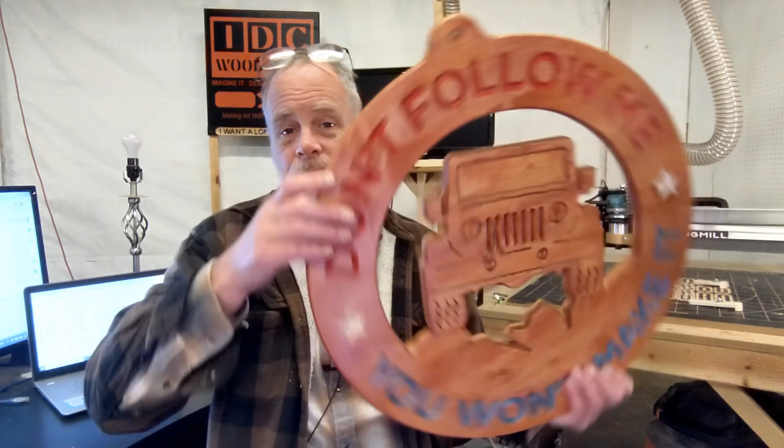How are you supposed to know when that bit change needs to take place? Does your software tell you? Does the CNC router tell you? Well, this is exactly what we're going to dive into in this video.

There are three ways that this actually can work, and that depends on your CNC router and the control software that's running your CNC router and something called a post processor. But I'm going to cover the most common way that most CNCers have to deal with this. It really goes along with the benchtop CNC routers.

And so we're going to dive into this by going through a project I just designed for my daughter, this LED acrylic project that has a lot of meaning. I'm going to just kind of run through it real quick. I won't actually do the design work, but I'll show you about the setup for the tool change and why this tool change takes place in the way that it does and the way it's going to work for you.

So on this project we will have one bit change. We're going to start off with a bit called an O-flute bit. Now this is designed to carve the acrylic material, and then we're going to switch over to the Widget Works diamond engraving bit to get a lot of fine detail into this project.

You're actually going to love this bit, and by the time you're done, you're going to know a whole lot more about this than most CNCers know, because I'm going to give you it at the technical level so you understand the back end of it, why it works this way.

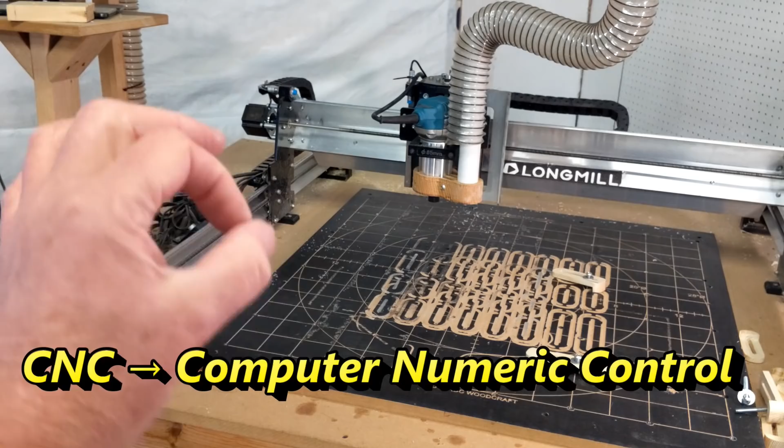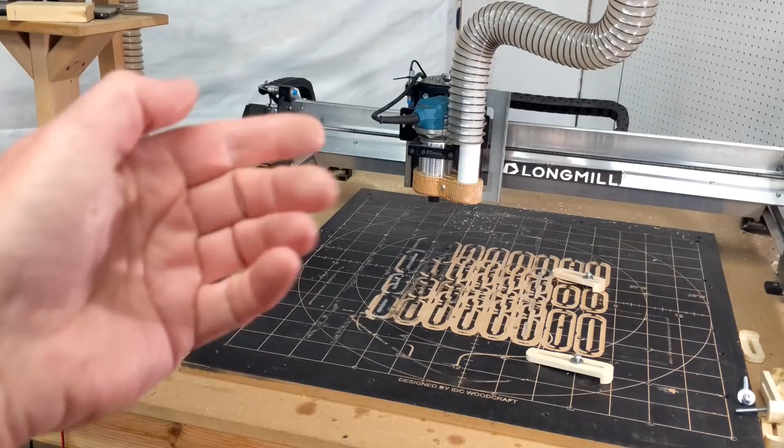It's a completely independent machine to your CNC machine. CNC stands for computer numeric control, and it is basically a machine that just moves around in space in an X, Y, and Z fashion. And then when you attach the router to it, that's what makes it a CNC router. If you have one that has this type of setup, this video is for you.

If you have one that has a tool changing probe set up on the side and it has that feature within it, within your router, where it can use that probe to set itself, then that's kind of the next level, but it still applies here to you.

The third one is when you have something called an automatic tool changer. Now, automatic tool changer is when all your router bits are already set up in holders and they're stationed along here or back there or in something called a magazine where they're all mounted in magazine indexes, and the router itself goes back and gets the next tool and goes right into its carving. That's an advanced machine that's got a lot more to the brains of it, very expensive.

Most people get these benchtop machines like the Longmill, so that's what we're going to cover in this video. So let's get into the software.

I'm going to talk briefly about this acrylic project and then how it's set up with a bit change, and then we're going to get into the bit change itself, and then we'll actually carve it out, and you're going to learn a bunch of details along the way, lots of tips and tricks as we go along as it relates to CNC routing.

Okay, we are in the design software where we're creating toolpaths, and we are going to define the points at which we are going to change our router bits.

So first two things I want to tell you. It doesn't matter what software you have for your CNC router, if it has this area where you can do your toolpaths, where you're telling it what bits to do what, you have the ability to write the code, and this is where the tool changing aspect comes into play.

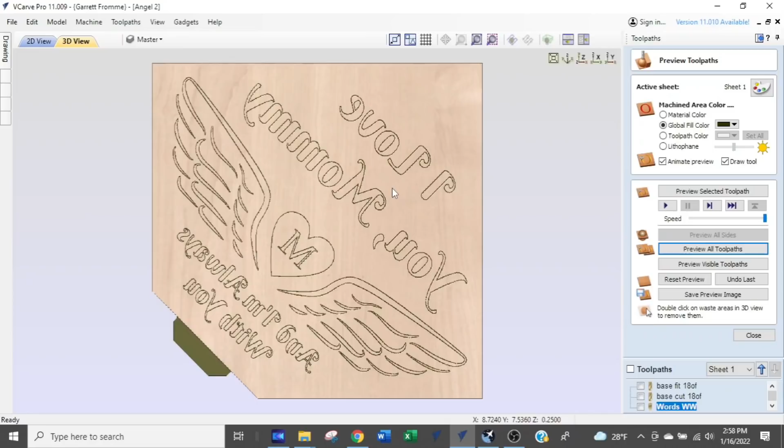Now you can do it with what they call O-flute bits, which I'll be demonstrating in a minute, or you can do it with an engraving bit. And I love the engraving bit because you can get really super fine detail if you want a really ultra detailed project. And then I have the lower corner here, and you see that's cut away.

And I've cut that away so it'll sit in the LED base like this.

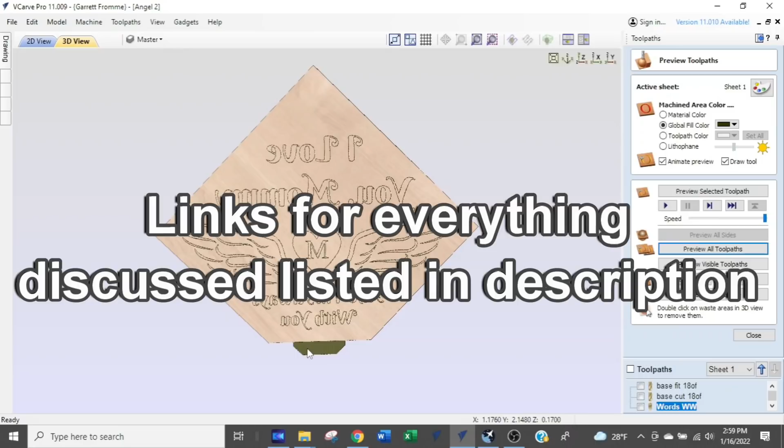So the first thing I'm doing is doing the work with the 1/8 O-flute bit, where I'm going to cut this green area, and then I'm going to cut out the corner, or cut it away. And then the second thing we'll do is do the engraving.

Why am I doing the cutting first and the engraving second? It's because I will leave the protective plastic on the acrylic while it's doing the cutting, because as little pieces of acrylic go flying around, it could potentially scratch a little bit on the acrylic, and I don't want to do that.

So the engraving tool does not spin. It's called a drag bit, so you don't even turn the router on, and so therefore it's not throwing a lot of debris. So here's what it's doing.

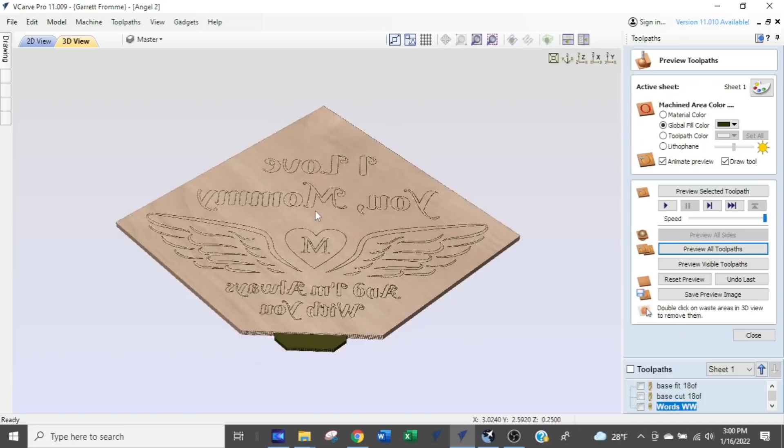I'm going to reset this preview, and I'm going to reorient the project, and I'm going to show you the first tool. I have 3 toolpaths, and the first 2 are with the 1/8 O-flute bit that's actually going to be cutting the project, and the last one is the engraving bit doing the design work.

So I'm going to click the little white box next to the first toolpath where it says base fit. What that's doing is actually cutting a pocket in the project.

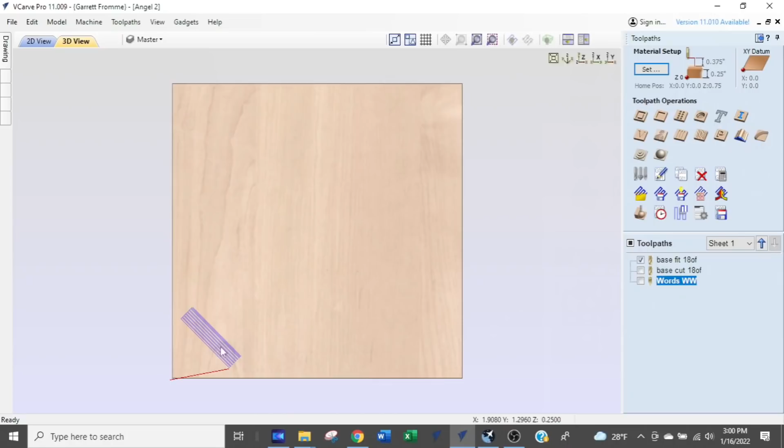And that pocket is actually thinning out the project material because the LED base has a slot in it that's 3/16 wide. The acrylic sheet that I have is 1/4 inch wide, so I have to make it a little bit thinner so it'll actually slip into the base.

If you decide to get acrylic to do this, I suggest that if you're going to get that base, you also get 3/16 acrylic. It needs to be cast acrylic. Plexiglass does not work, or general acrylic doesn't work. Cast acrylic is interesting because it's very stiff, rigid, and if you drop it, it'll break like glass. But it's much easier to carve.

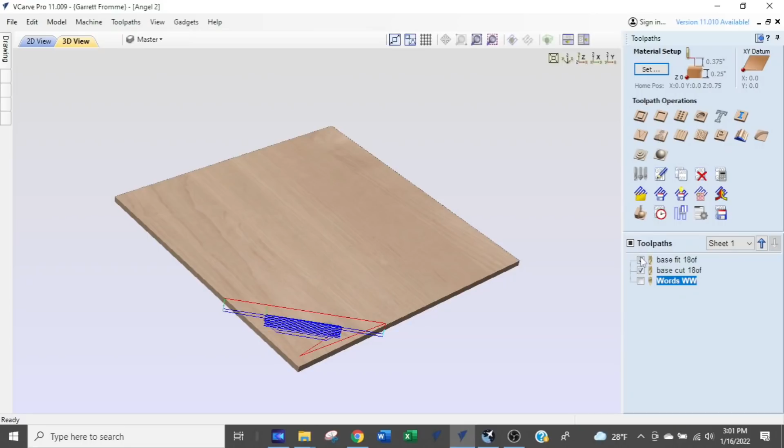So that's the first cut, is to make it thinner so it'll slip into the base. The second one cuts the corner off, and you notice I got kind of an interesting shape on that corner. I'll explain that to you in just a minute because it was a brilliant little test that worked great. And then third, with the engraving bit, it actually carves everything out.

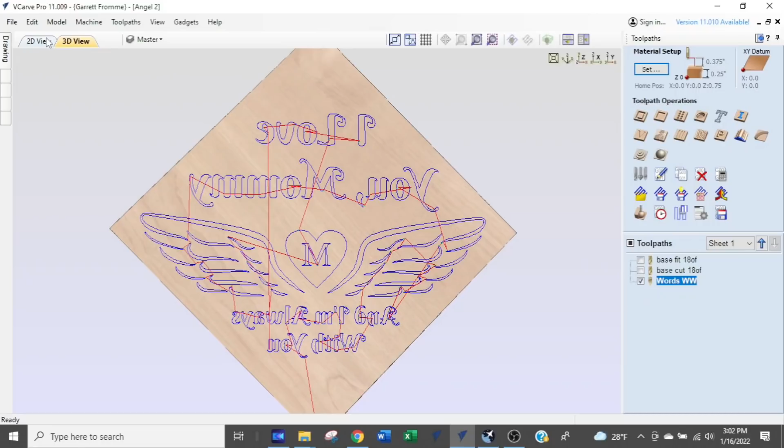Before I go on, I want to show you the project itself and what it really is and what it means. So I'm going to just change a couple of my settings here, and we're going to flip over to 2D. And so this is the way I've designed it on the project.

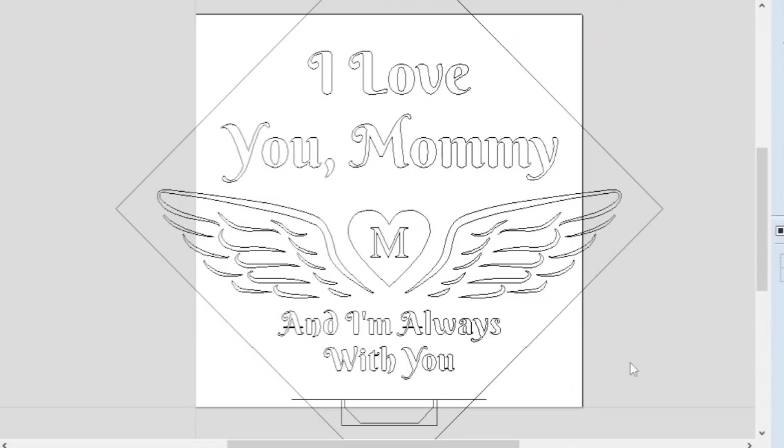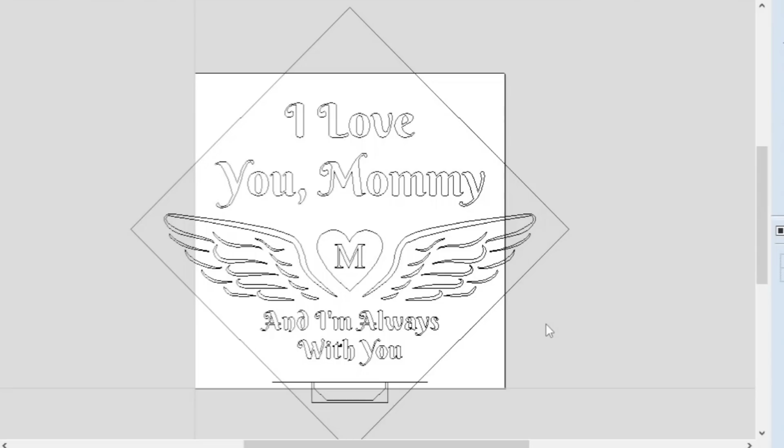I've rearranged it so you can see what it actually says. It says, "I love you, Mommy, and I'm always with you," and it has angel's wings and a heart and an M in the middle. This is for my daughter, who 4 years ago this month, January 2022, gave birth to Maddox, my third grandson. A little while later, Maddox died in her arms, so this time of year is pretty tough for her. She likes things like this to make her feel a little closer. In a way it's sad for her, but in a way she likes it. So that's why I'm making this.

Let's get back to the other aspect of this project. We are going to have this project looking like that when it's done, except it's going to be really cool with the LED. So this is where it becomes really important for you to know and understand this bit-changing process. I've given you a lot of precursor as to what we're going to be doing here for this bit-changing thing. It's important to understand all the upfront stuff in order to understand why we do the bit changes the way we do it and how it's going to be processed through the entire system when you get to the bit change. So we're going to get back into the design software and start talking about saving toolpaths and into the bit change aspect of this. So you're getting a lot of information. Give me a thumbs up if you feel like I'm giving you some extra tips in this video. All right, let's get back into this.

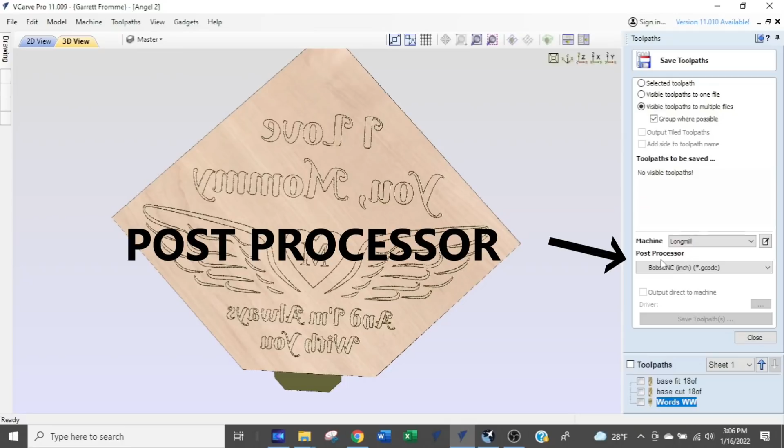In the Vectric software, we are going to go into saving our toolpath. Now in your software, whatever you have, if it's not Vectric, you save your toolpath in one way, shape, or form. When you go into Save Toolpath, you may have a selection in there of the machine that you have. All routers have certain codes that they have to know what to do, and it really depends on the sophistication of the machine that you have. But that code that is being put into the router is dictated by something called the post processor. The post processor is basically a rule book that tells Vectric, or your software, how it can write the G-code and how it can't write the G-code.

Now I want to explain to you what G-code is so you understand this. G-code is the language that our Longmill here, or your CNC router, uses to know where to move to and how to move to that position, and all the different moves that it makes. So G-code is the language that your CNC router speaks. It's not something you have to know, but you just need to know that it's something that's in a file that's going to be dictating how you're going to be handling your router bits when you're doing your router bit changes. So that's what G-code is all about.

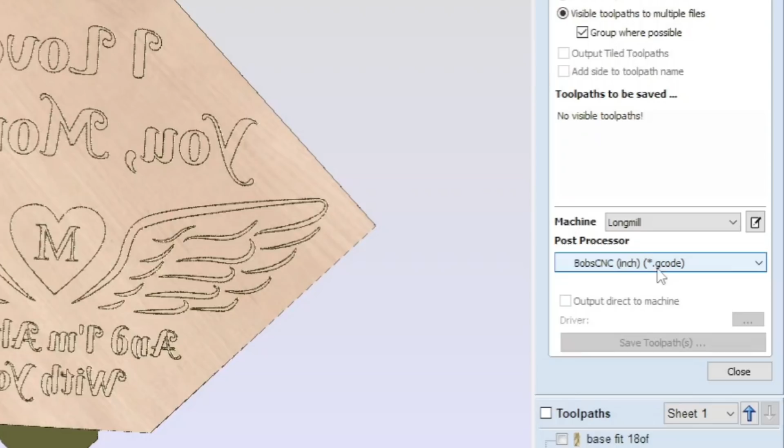Let's get back into this. So when we're talking about the benchtop CNC routers where you have a trim router mounted to it, there are certain conditions that have to take place to enable you to stop the router and be able to change that bit. And that's what the post processor is set up to do. Now if you look here, I have a Longmill CNC router, and currently I'm set up with a BobsCNC inch post processor. Sometimes I use the Grbl. I have a Longmill, and Longmill actually has finally written one for their machine, so I'll be importing that. The Vectric software, in the next version or upgrade, will probably have the Longmill post processor in it. So anyway, this is the dictator of how that code is written and how you change your bit.

So let's explain this a little bit so that you understand what happens here. Your CNC router has a brain—it's got a control box that's attached to the machine itself. That's the electronics that's integrating with the machine. It's built for your CNC router.

And it can interpret some of those codes, and other codes it can't, or is not designed into the firmware on the board that tells it these are codes we will use or not use. So with our machines, there are two scenarios that will happen. The software, by virtue of the post processor, will write separate G-code programs for each router bit, or it will write a code and interrupt it with a stop command.

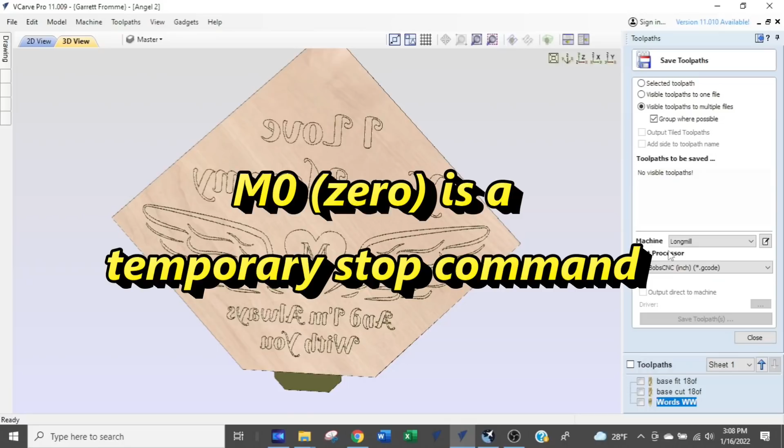That would be a code that says M0, and that is what they call a temporary stop. It'll pause the program, and that's where you can change your router bit. Usually when you have a post processor that inserts that code, there will be text underneath on your display screen that says, okay, we're using this router bit now, insert that bit. That's one way. The other way is it has separate G-code files.

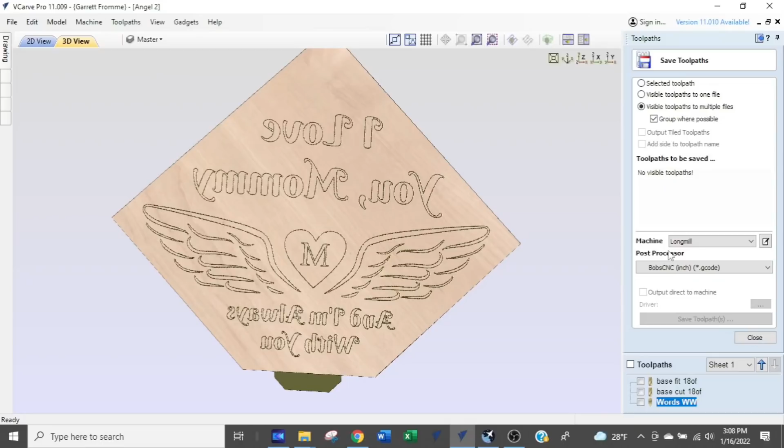Your CNC router will probably take the separate G-code files, especially if it has a trim router attached to it. So let's rehash this a little bit. There's one of two ways your CNC router is going to tell you that you have to change your bit. Number one is the most common, and the one you're probably going to deal with, especially if you have a Longmill CNC router, Shapeoko, Bob CNC, or Millwright. All of these will write separate G-code programs. You have to run the program out all the way and literally load a separate program.

Some other machines have a little touch plate next to it with an automatic cycle inside that requires another G-code, and that's where you'll have the M0 command. It also depends on the control software you're using, the software that is actually driving your CNC router. I use Gsender, and I'll be showing you that in a minute, and that's the one I totally recommend if you have any one of those machines I'm talking about.

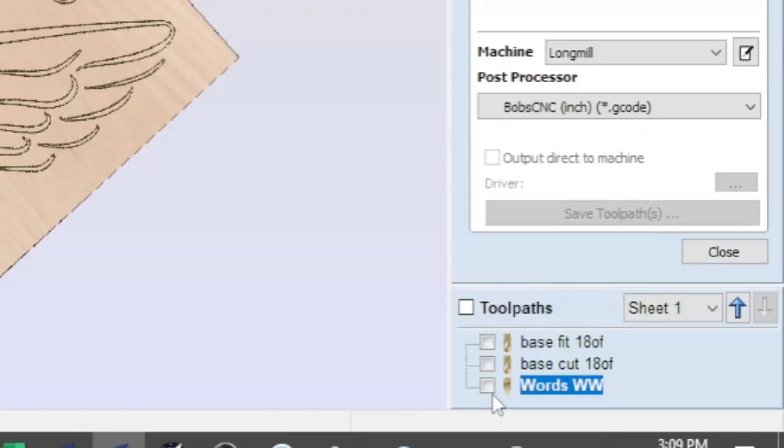So what we're going to do is select all the toolpaths together. That means I'm selecting 2 router bits, the 1/8 inch O flute and the Widget Works engraving bit. I select them all by clicking this little checkbox next to Toolpath. And when I do that, we are ready to go.

Now, up here is where we're going to tell Vectric how we want that G-code written. Vectric is going to use that determination to decide whether it can or cannot write that G-code based on the post processor we are using. Kind of hard to explain, but think of the post processor as a gate with a set of rules - if you pass through the gate, you have to take those rules with you.

So I'm going to show you what I mean. In Vectric, we're going to ignore this top button, and what we're going to do is select the second one where it says visible toolpaths to one file.

What that's saying is it's going to write a G-code file with all the toolpaths that are visible. Now, visible is whatever is checked down here, and you can see the blue lines over here, that's considered visible. So we've got all of them checked. I'm going to click this radio button right here.

And you're going to notice right away I get an error. What that error says is the visible toolpath used different tools, and the selected post processor does not support tool changing. What that is saying is the post processor is saying you cannot change your bit in one G-code file, or in other words, we cannot run one bit, have a change, and run the other bit in one file. We have to have separate files.

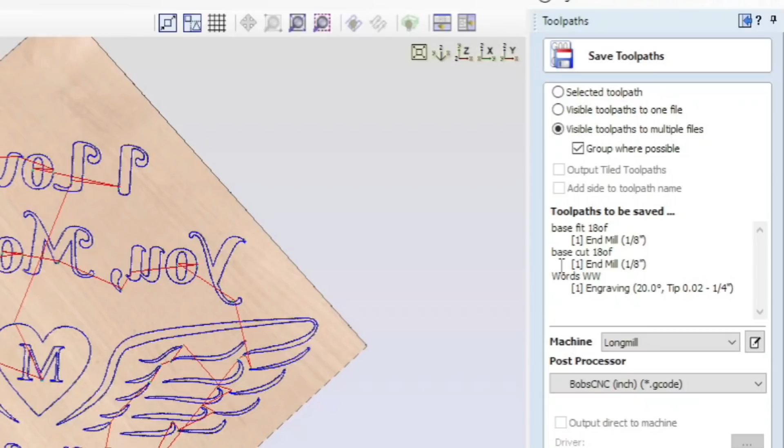So this is not working with this button of all the toolpaths that are visible to one file. So if I look at the next one, I say visible toolpaths to separate or multiple files, and I check that, and suddenly everything is good to go. I have no error, and it has all three toolpaths listed here. That means that what Vectric is saying with no red lights here is I can write that G-code.

So now we can actually save the toolpath. And what that means by toolpath is it's going to write multiple G-code files, one for every bit that I have here.

There's a little bit more to that element, which I have another video for, that explains this whole thing down here and this whole toolpath routine, which you'll want to get into.

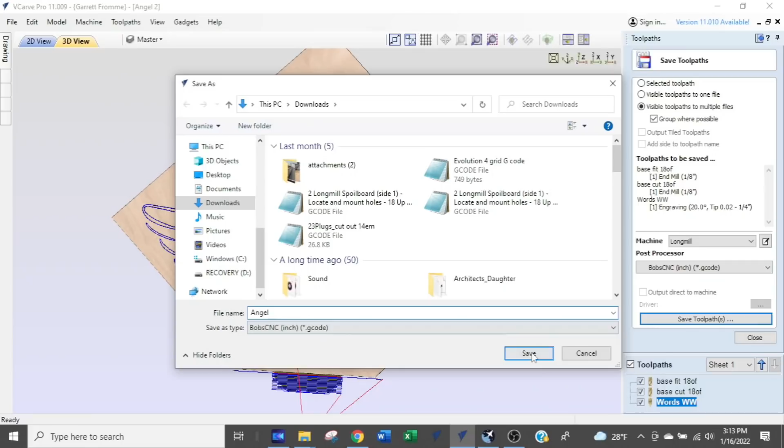Okay, so we are going to hit the Save Toolpath button. So I hit that, and nothing happens. Oh, there it is. Okay, so I am going to give this a name. I'm going to call it Angel, and say Save. And now Vectric has written the G-code files based on this post processor here, and for the toolpaths that I have checked that are visible based on the setting that I have up top here.

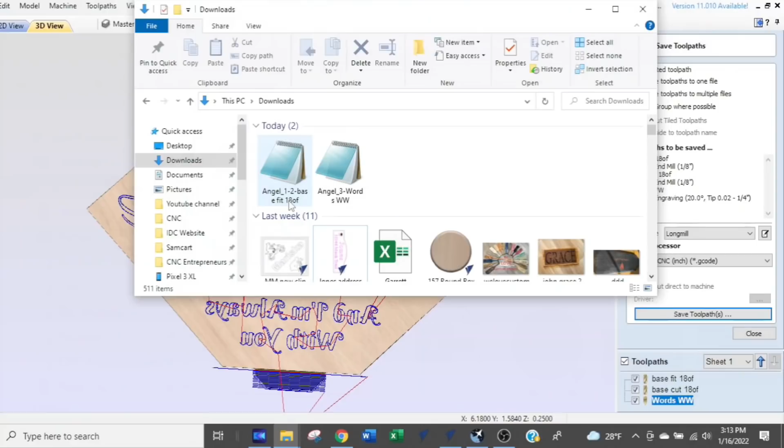So I go into that directory, and here we have two separate G-code files. We have the one for the 1/8 O flute. Vectric has merged those two toolpaths together. If you remember, I've got the two 1/8 O flute toolpaths here.

Right here, I told it to group where possible. So it can group the two separate toolpaths using the same bit into the same G-code file. And so that's what it has done here. And I know this by looking at it saying Angel 1 and 2, that way I know it's got toolpath number 1 and 2.

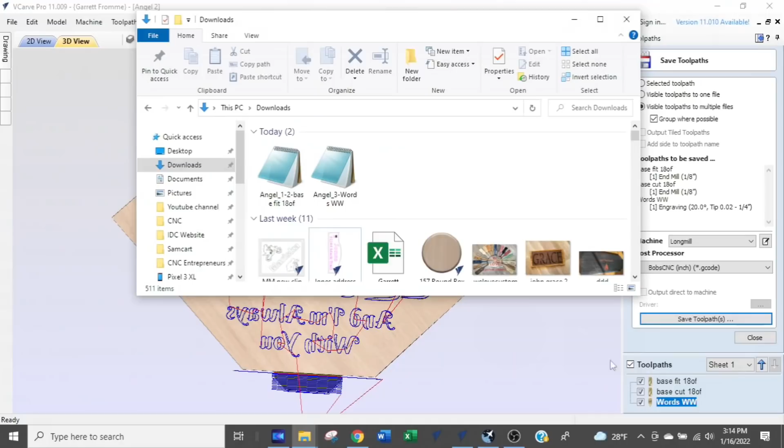And I've named the file with the bit name in it, so I know this is using an O flute bit. When it comes to naming your files and making sure this information imports when you save this file, and it imports into the name, when you name your toolpath, make sure every toolpath is very clear in what it's doing and what bit you're using. So that's what this is.

So now I can run the first two toolpaths, which are going to do this work on the project, and then when it's done running that G-code, I have to load in the second G-code, and I will know that it's with the Widget Works bits. Then I change the bit. So this is how I know. This file will run out, and then when it's done, I change the bit to the next file.

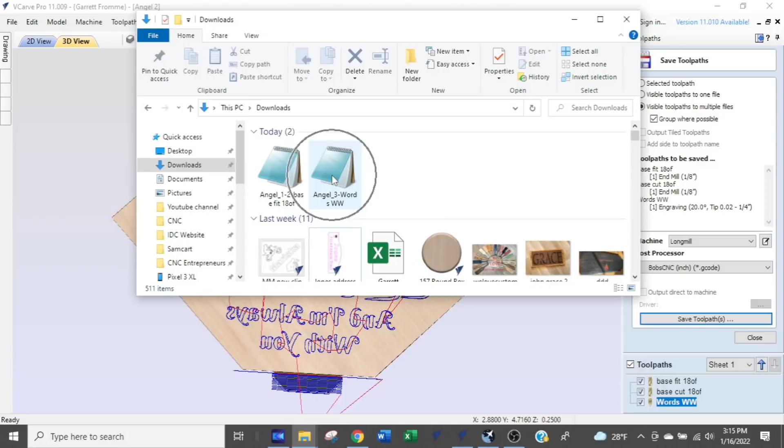So what we're going to do is go over to the Gsender software, and we're going to import it. So now we're in Gsender. Now I want to explain to you what Gsender is. When it comes to CNC routers, there's several different levels to keep in mind. One is the design software that you're working with.

And the software that's going to write the G code - that's why I endorse Vectric, because they had the design and the G code writing feature tied together in their software. And then you have this, which is called control software. What this does is it actually runs your CNC router.

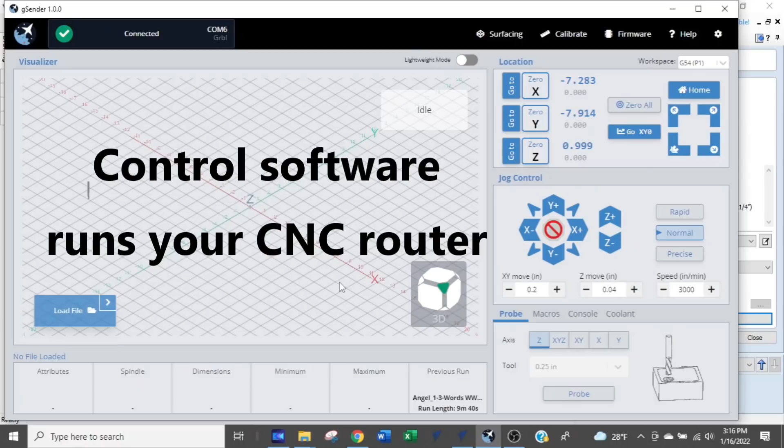It is the software that's transferring information to the router. It's where you're setting things, you're setting your bit, you're telling it where to start your cut at. There's many different things available in this. There are lots of different control softwares out there, and they're free, just like Gsender is. I am a huge Gsender supporter for a multitude of reasons, and I'm going to explain that here.

Number one, Gsender is the most recent software. It is actively currently taken care of by the writers of the software. Most of the other control software that is out there is not being worked on anymore, or it's working on older Windows platforms, so it's not up to date. It's getting more and more bugs as things go along.

This one is literally written by Longmill, which means that it's optimized for the Longmill CNC router. It will work with any other CNC router that is what they call Arduino based. That's basically the circuit board that your router is working from, and what they call GRBL, which is the firmware or the hard software on the board that dictates a lot of things. So if you have an Arduino router and a GRBL platform, then this works for you.

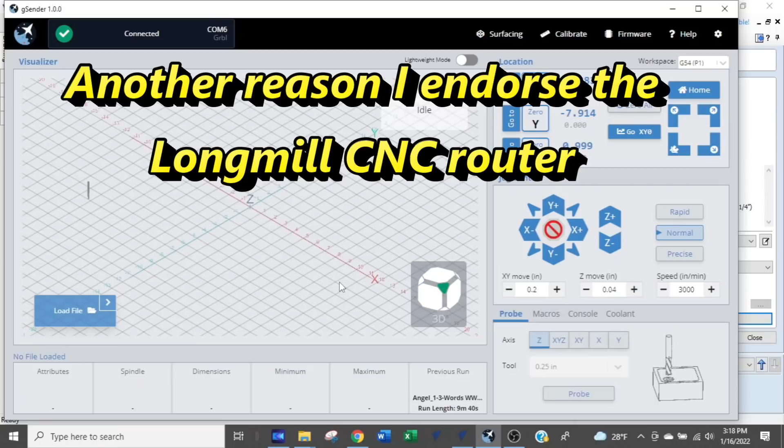And I can tell you, virtually every CNC router's benchtop is GRBL. This is why I endorse this, and why I endorse the Longmill CNC router, because the control software is built with the Longmill in mind. So you actually, the only company outside of a couple others that actually has their own control software that they have optimized for their machine, which is great. So you've got support on the software. That's the other thing - you normally don't have the support with the software, or it's separate. So lots of reasons to say, okay, the Longmill is good. It's got the software here. I endorse them both, and there we are.

So what we're going to do is we are going to import that file, the first file, into the software. So I'm just going to click the load file button.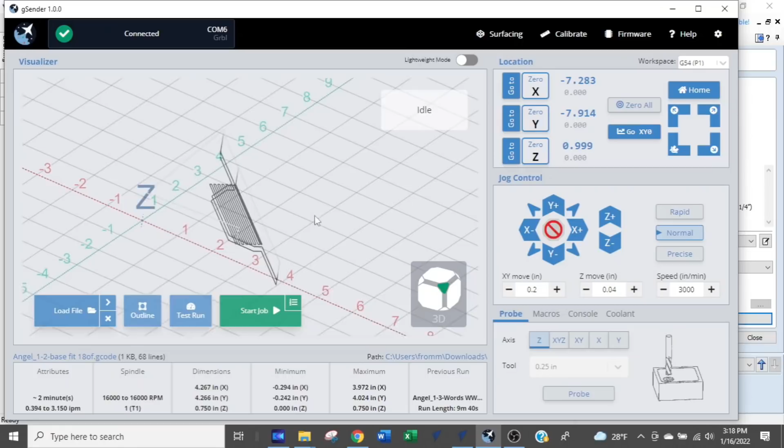Let's keep going. So we're loading the first one, which is the 1/8 O-flute. I'm going to click that, and it imports. And so now you can see it's got that little square area, and it's also got the little area where it's cutting out the project itself. So now it's going over to the router, getting the router set up with the 1/8 flute bit, and then we move on to the next part of the project.

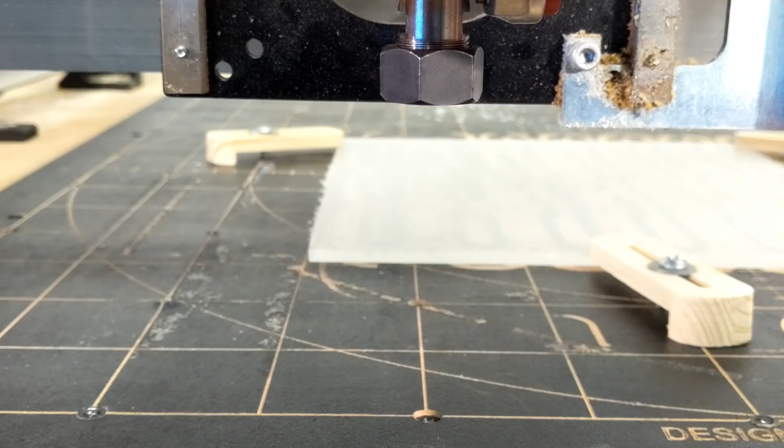So now I'm going to set up the router with the 1/8 flute bit. The first bit we're going to use is the 1/8 flute bit. Let's just take a close look at this bit so you can understand how this bit works. One of the things it has is a very fast run up of the spiral right here, and what that's designed to do is to eject that plastic out really fast so that it doesn't stick to the project.

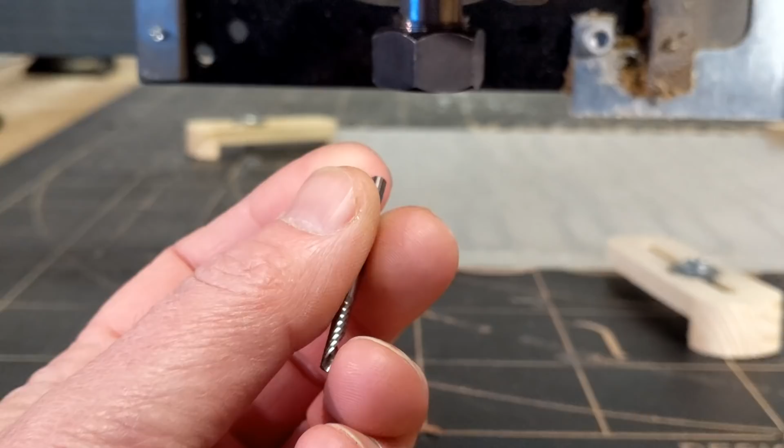The other thing we're going to be using is a reducing collet, because this is a 1/4 inch collet and I'm not using the 1/8 inch collet right now, so I'll just use a 1/4 inch to 1/8 inch reducer. It's a little easier, and it's available on the IDC Woodcraft store if you want to get one. So we're going to put it in there, put the bit up pretty high in the collet of the machine, and then tighten it down.

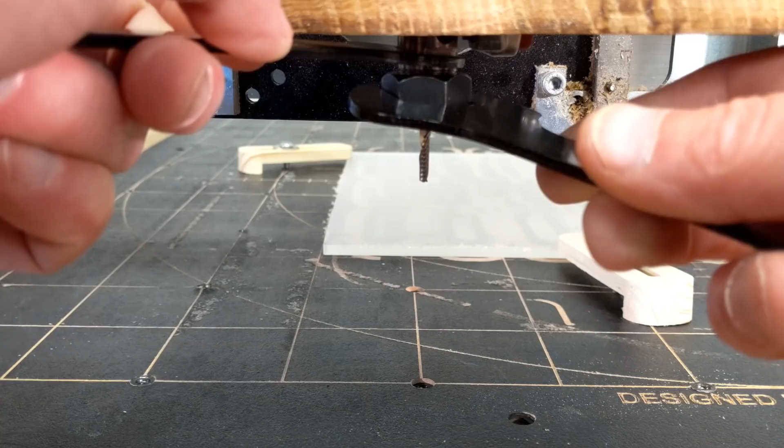Now once this is set up on our X, Y, and Z zero, we can leave the X, Y alone for the bit change, but the Z zero will have to change because we'll be changing the bit. So let's set the X, Y zero first.

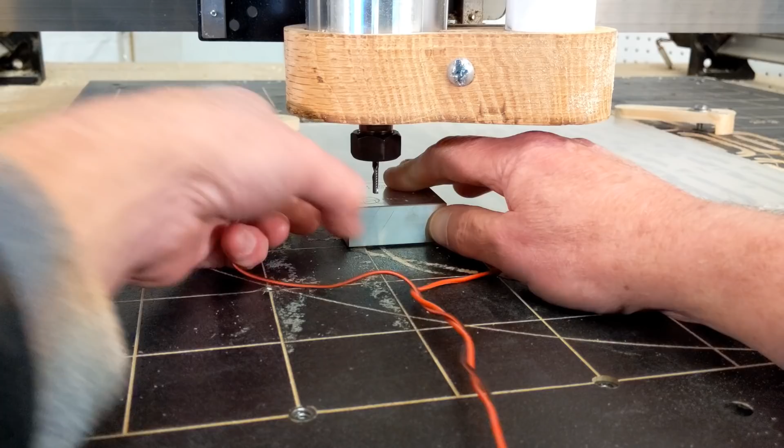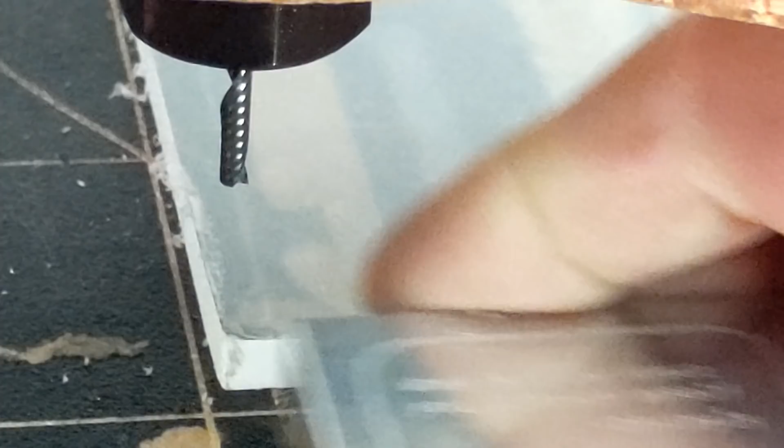Now I have a little bit of room for the touch plate, about 1/4 of an inch, and it's resting right on the corner of the acrylic that I have set up here. We're only setting the X, Y, we're not setting the Z. We'll set that differently because the Z is set off the surface of the spoil board.

So that's connected, and we're going to go into gSender to set up the X, Y. In gSender, in the lower right area, we have several tabs we can choose from: Coolant, Console, Macros, and Probe. We are working with the probe, so that's the one we want to be on, which is what we're on right now.

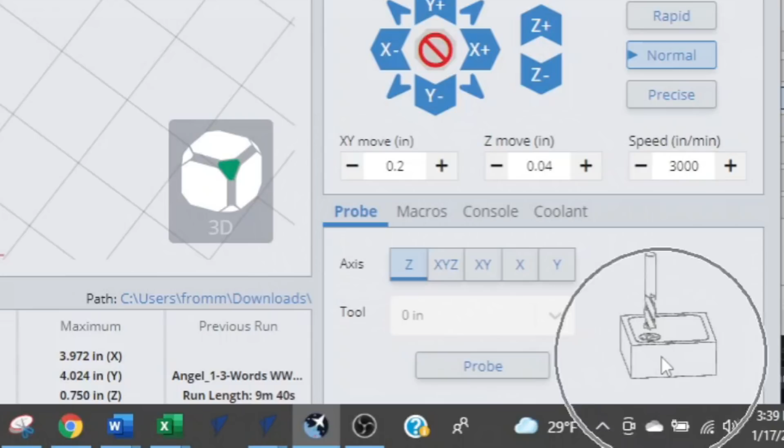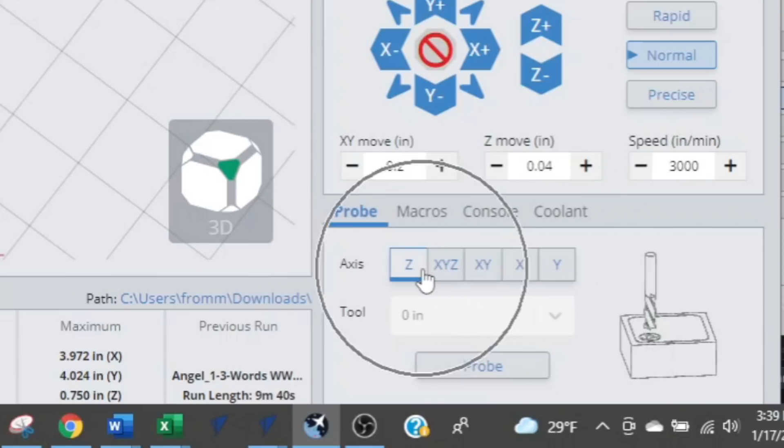I want to point out this little picture here. It's an end mill and a touch plate, with a little circle, and the end mill is over the circle. That's your reference as to how you want to be preset before you start this cycle. The other thing is these 5 buttons here where it says axes. Depending on which one you select is what you'll be setting your zero reference from - you can do X, Y, Z, just X and Y, or just X or Y alone.

Since we are not doing Z, we're going to do it as a second operation because we're setting off the spoil board. We just want to go with X and Y, so we select that. This little window down here lights up, and we want to put in the diameter of our bit, so we type in 0.125. Now you'll notice it defaulted right to inches. If you want to work in millimeters, you'll have to go into the firmware settings at the top and change your defaults to metric.

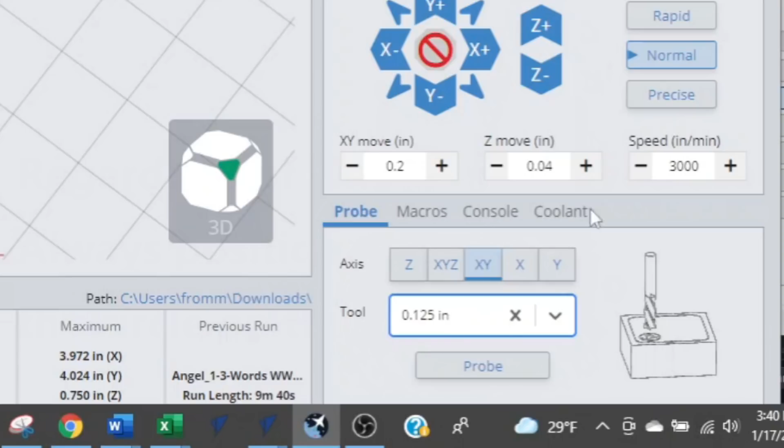Now we are set up, so what we need to do is press the probe button, and this window pops up. You see two things: one, we have a red light, and a grayed out button we can't press, and it says 'no touch' right here. So what we have to do first is touch the plate to the bit, and that'll ensure we can create a contact, because if you can't create the contact and you start the cycle, you can potentially break your bit or damage your plate.

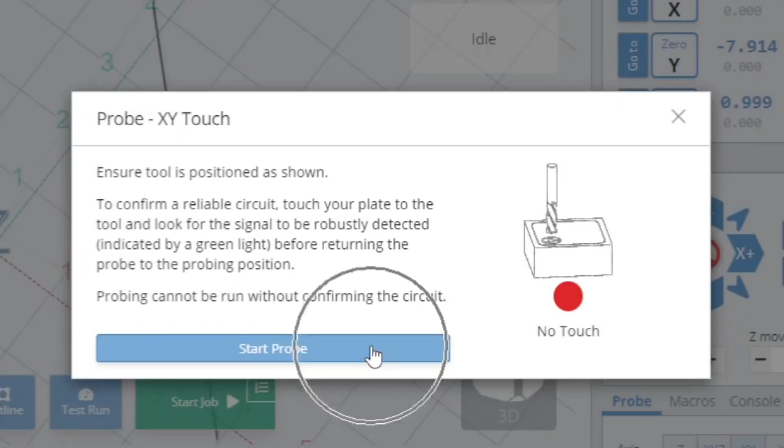So I am just going to lift the plate up and touch the bit, and the light turned green, and the text underneath the light says touch completed. The blue button is now highlighted. You see we went back to red - that's just however they set up the program. But we have confirmed that we have the circuit now, so we are going to start this by clicking this button. Here we go.

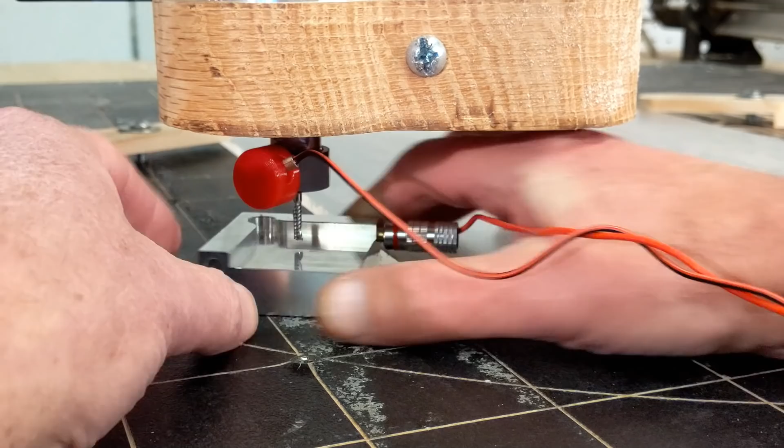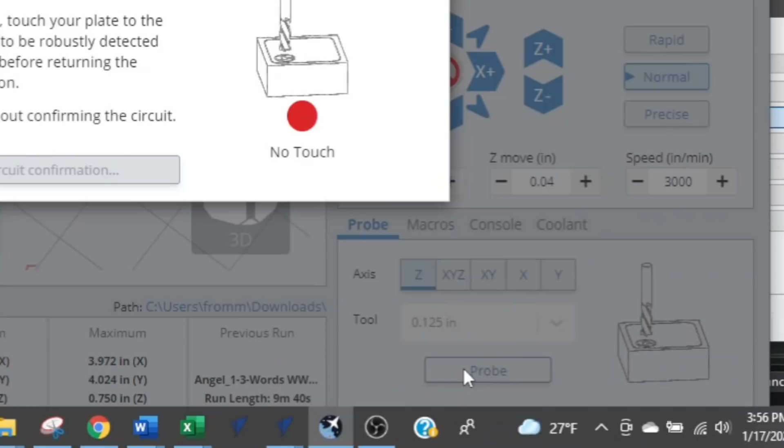Now that we're set up on X and Y, we just switch over to the Z, and you'll notice this is grayed out because the diameter of the tool is irrelevant when you're doing a straight down touch. So we're going to probe again, and we get the same light. We're going to touch off on the plate. We're good to go, and we're going to press the button.

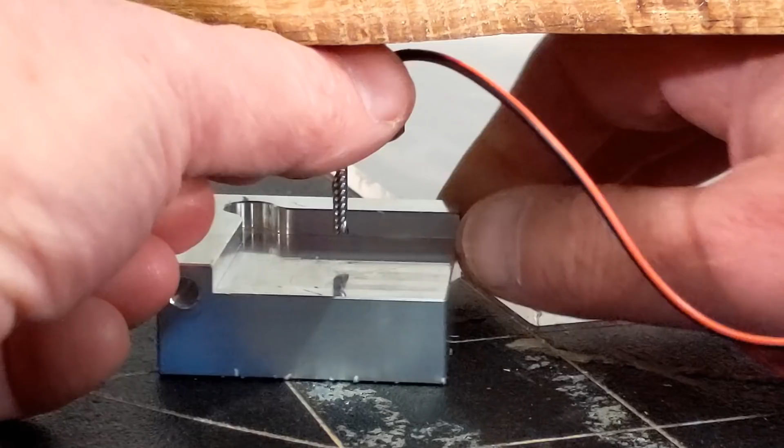Okay, so we are set up with our X, Y, and Z, but there's one thing we need to check before you get started, especially when using clamps: make sure the tool path your bit will be taking doesn't run into your clamps. Something we don't always think about. So we're going to jump back into the Vectric software and take a quick look, then verify that on this project our clamps are in the right position to keep from breaking our bits. Let's get back into Vectric.

One of the things we don't always think about when making our projects and clamping them down on our machine is the position of our clamps relative to the tool movements. This is something you always want to get in the habit of being aware of.

As we're looking at the project here, this is where the tool zero position is, lower left corner toward me at the left. All the red and blue is where the bit is going to be traveling. Obviously we don't want anything inside, but we have a big open space over here. We've got a corner or edge along here we could clamp on, a space right in here, and an edge along the top and side. So where I'm going to clamp on this is clearly up on this corner.

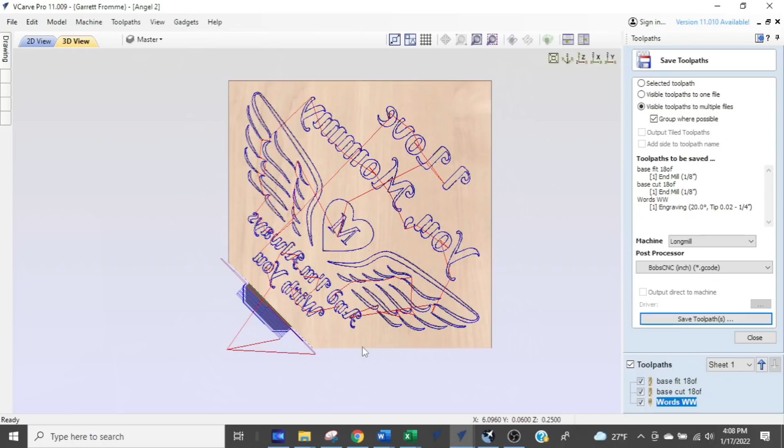We have some hangout here just from the distance of the clamp, so I'm going to either clamp right here or right here, and I think I'll just clamp it right here. One thing with clamps, I always like to leave the minimum amount of clamp edge on the material, just to keep the clamp out of the way. So that's how I'm going to set this up.

You can see that's exactly how I have it set up with the acrylic—right there on that corner, that corner, that corner, I'll be clear all the way through. The only concern would be right here, and all I have to do is measure that space in the software to make sure the router will never get close to there. I can't just take into account the diameter of the bit, but also the nut holding the bit, which is about 1 inch in diameter, and because the bit is only in the machine that far, it could potentially hit that clamp. So we just want to be aware of all these kinds of things.

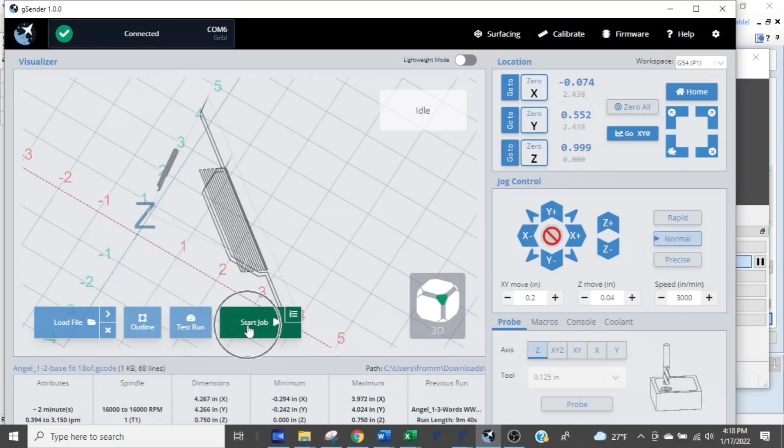So we're going to hit the start button now and run out the first corner right here, and then we'll do that bit change. All we have to do now is start the cycle, keep our eyes on it, and cut away. We're going to hit the start job button right here, and that'll send the router going after we turn the router on. And here we go with the acrylic project.

We are working at the bottom of the project, and the first thing is to cut out the area so the project will sit into the LED base, which is 3/16 of an inch thick. So that's the material you want to get instead of 1/4 inch.

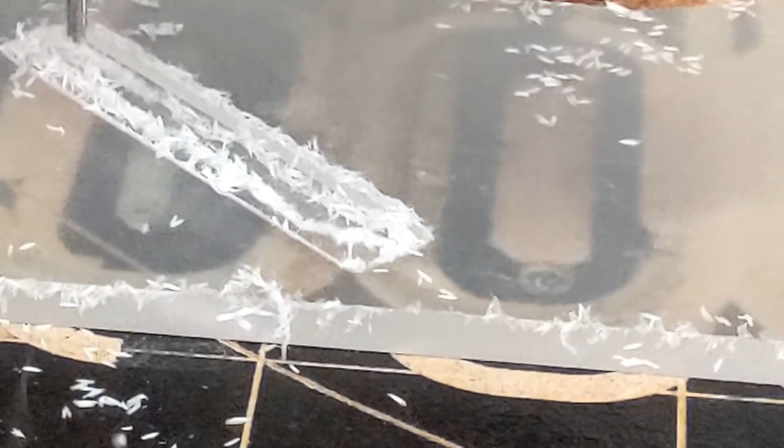Now you see there's a little fuzz hanging off the side there—that's because of the protective plastic on the acrylic. This is what your chip should look like, little pieces of rice coming off of it. And if that's what you're getting, then you are in good shape with your feeds and speeds.

And finally, we're going into the cutout of the base. This is the standard feed rate we'd be going at with acrylic, so you can see you do a lot of work on it really fast as opposed to wood. And that's it with the 1/8.

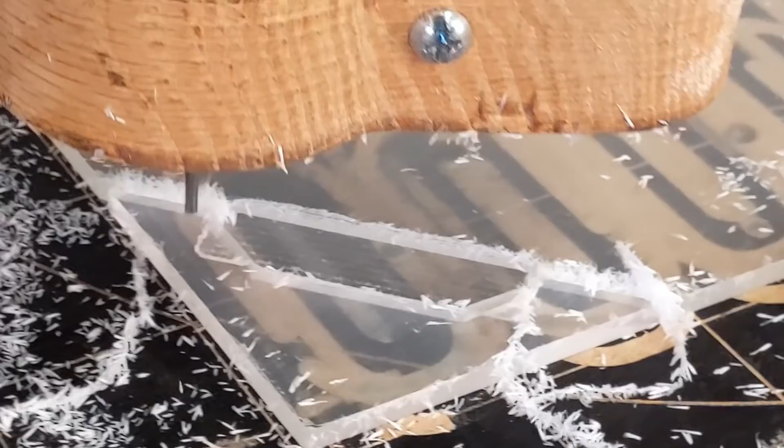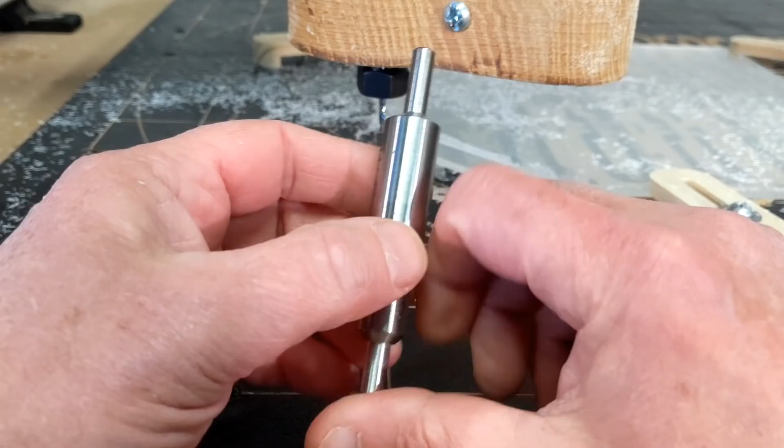Now we're going to set up the Widget Works engraving tool, and I have on here currently the 120-degree engraving bit. You can get the 90-degree engraving bit as well if you want to engrave steel or other harder materials, but for this one we're going to use the 120-degree bit. Now, notice this bit is actually quite long—about 3.5 inches from here to here, so it'll be sitting up quite high.

One thing with this engraving bit—do not turn on the router. This is considered a drag bit. So let's get that changed out.

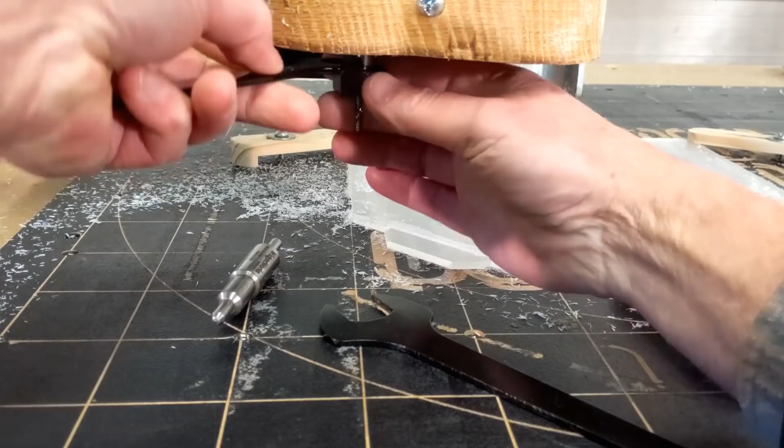So we change this thing out. You see the bit looks fine, the O-flute bit—these things will last a very long time. One of the things you want to get in the habit of is cleaning out your nut and collet every time you change a bit, because debris does get caught up in there and it can throw off the trueness of your bit. Now with the Widget Works, you want to make sure it is inserted all the way into the router when you tighten it up.

Now with the drag bit, you can't use this. You cannot use it because there's no conductivity. You won't have a complete circuit because the tip is a diamond. It's non-conductive.

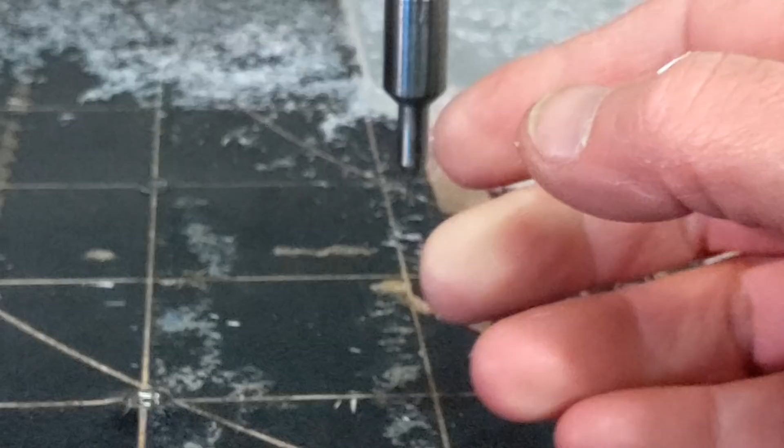So we have to use the paper touch method. We're going to touch down right here. We want all the dust out of the way, and we're going to move the machine over to that area.

And we can see by the shadow right here that we are starting to get quite close. We still have a little bit more to go, but it's pretty darn close. So we're going to take one more tap down. The good thing about this bit is if we actually touch and we don't want to, it's spring loaded.

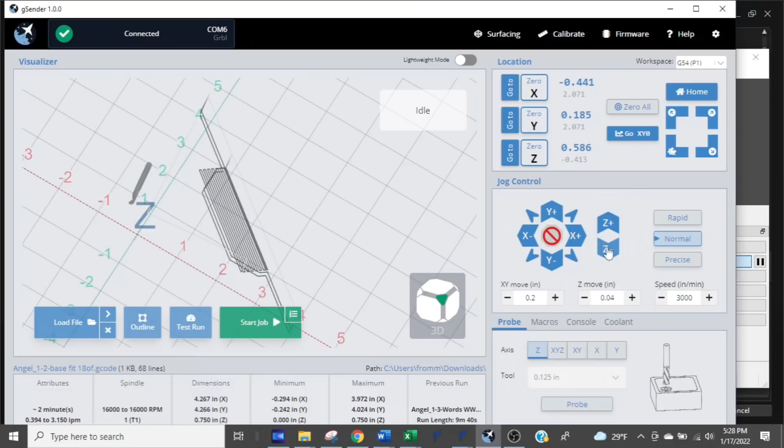Okay, so it hasn't touched. Now I have to go into gSender. This time, we're not going to use the probe method. We're simply going to tap the Z down until we can't move the paper. So we're going to be wobbling the paper back and forth as we're pecking the Z down.

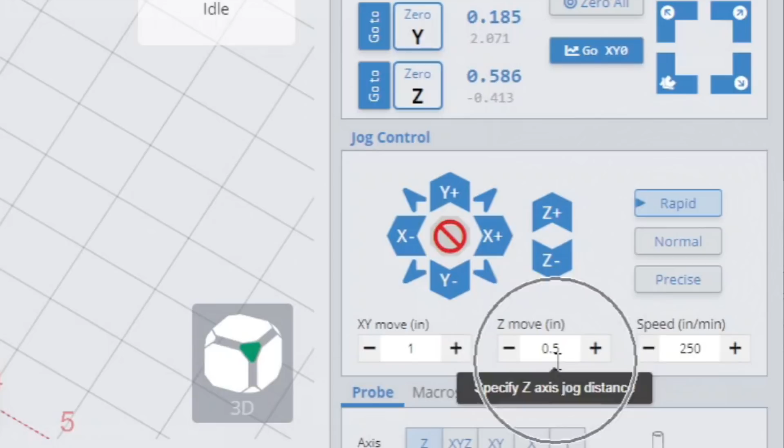Now, one of the things with pecking the Z down until it touches is you want to check your settings over here. You've got the 3 buttons: rapid, normal, and precise. Basically, each one is, for every time you press it, shortening the distance it's going to travel. For example, on rapid, when I click that, the Z travel will be 1/2 of an inch every time I click this button. Under normal, it'll go 0.04 of an inch, and under precise, it'll go 0.004 of an inch, and that's the one we're going to be using.

So here we go. Okay, so now we're tapping it. I have a video that explains how to use the paper touch method, and if you don't have a probe, how you can find the exact X, Y, Z corner of your project.

So the paper is stuck. This is where we're actually going to set it. I'm actually going to nudge it down just one click more. Now every click is 0.004 inches.

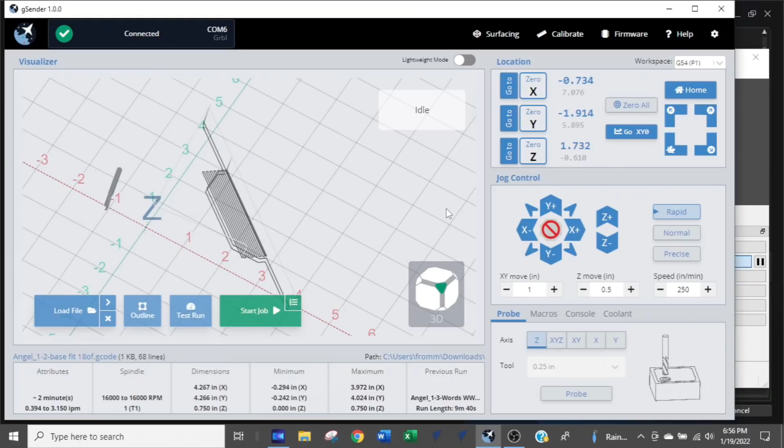And then we're going to set our Z. On the CNC router, we set the engraving bit to its 0 point manually. So that's what we're going to have to do here. We cannot use the probe feature. We're simply going to tell it where our 0 is.

So if you look up in the upper right area, you have an X, a Y, and a Z. Our Z at this point is at the 0 position that we want. But you can see this number right here does not say 0, so we need to set it to 0. And the simple way you do that is just come over to the Z button and click it once, and you see the numbers have now gone down to 0.

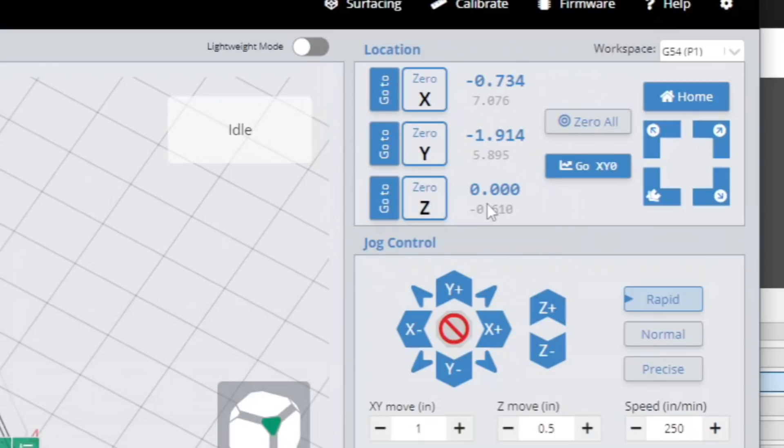And now all we have to do is just raise the bit up about an inch or two. So we're going to do that right now.

I want to come back to the Vectric software, to the design of the project for just a moment to share with you a little tip that you probably didn't know, and you will now know. An interesting little tip. Okay, so you remember I was talking about the post processor being like a gate with a set of rules, and those rules dictate what has to go into the G code and what cannot go into the G code. So it's just a set of rules.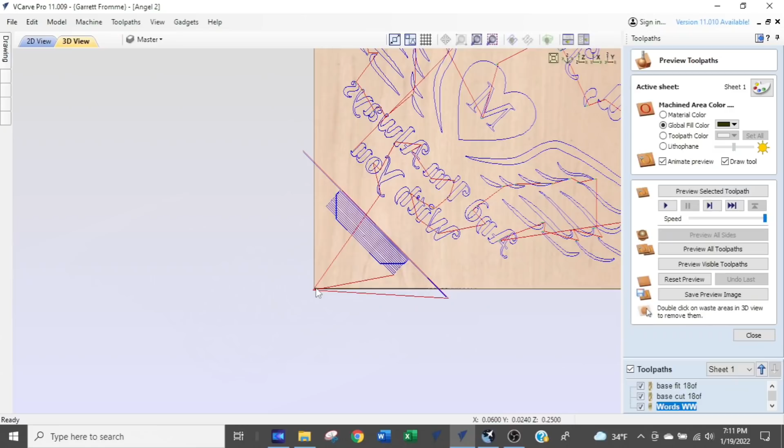So right now I have set my diamond engraving bit somewhere over here. I've already cut this corner off, and I brought the bit somewhere in this space over here to set my Z. And I've set it, now I've raised it up. But if you noticed, I didn't try to position the bit back over this 0 start point because I don't need to.

What the machine is going to do, because the post processor tells Vectric it has to insert this code, is it's going to first raise your bit up to a Z safe height. That's a position you have set in your software for the bit to raise up to before it starts to make its moves. So it's going to raise up from this position to a Z safe height, and then it's going to first move over to this 0, 0 XY point.

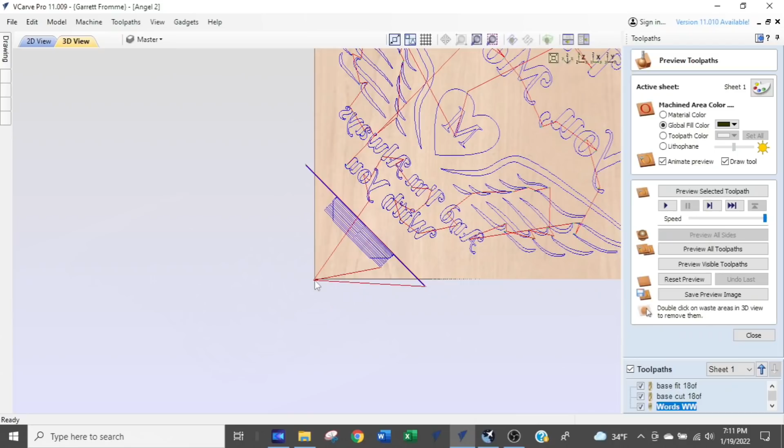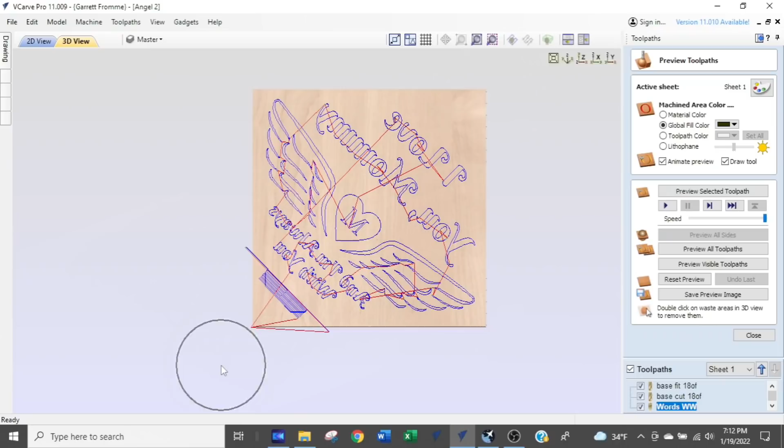Doesn't matter where you've set your XY0, whether it's this corner, in the center, up here, no matter where your router is sitting, when you start that program, it will always go to that 0,0 XY00 position first, after it's gone to its Z safe height. And then it'll go and do all its project work, and then it's going to come back to that 00 position and end the program. So I'm just leaving the bit over here. When I start the program, it'll move over here first, then go do its carving, and then come back. And all G-code programs are written like this, no matter what your machine.

It's standard in post-processor rule books. But there is one more thing I want to do, and this is the whole reason why I ran this the way I did: I'm going to take this film off now, vacuum everything up, take the film off, and then engrave everything. The film I left on here just to protect it from any chips flying that could cause scratches on the plexiglass itself, the cast acrylic. So we're going to pull that up after we get it cleaned up.

Well, we're coming to the tail end of this thing, and you get to watch an acrylic project being made. And it's so easy—you've got to get into these lighted acrylic signs.

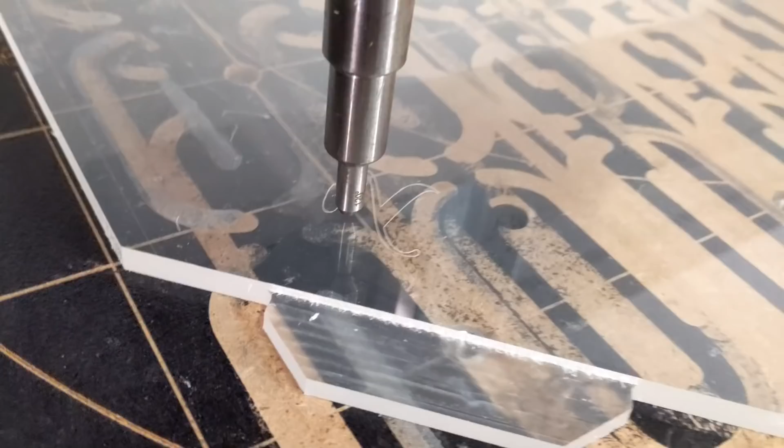This is the Widget Works diamond engraving bit, the one that I recommend most. It's industrial strength. Most of the ones you find on Amazon don't hold up to the harder materials. If you want to cut steel or etch on steel or granite, this is the bit. This bit is used by General Motors, NASA, Campbell Soup—high industrial stuff. But look how fast this thing goes. This is running at 40 inches per minute, so you can get a lot of detail really fast in this type of project.

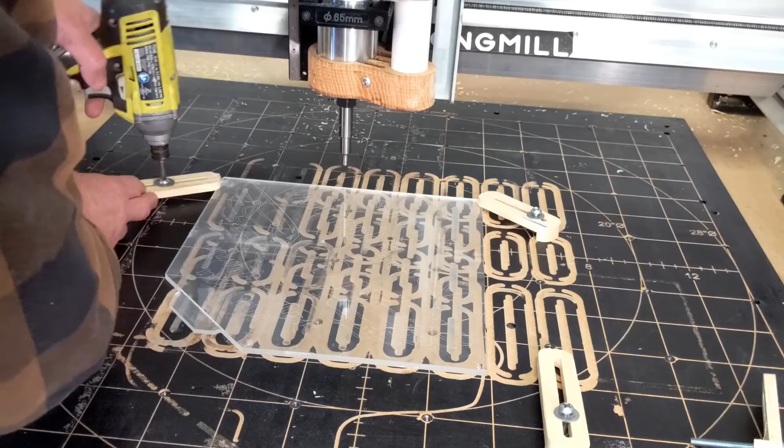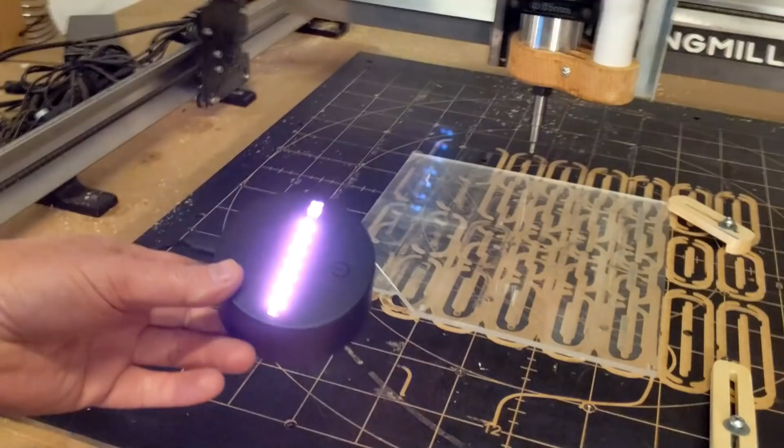You see the clamps, by the way—I make these and I make them available to you as well if you want to make your own clamps, because we have CNC routers to do that. Don't buy clamps. So this is the LED base. I get it off of Amazon, there's a link down below, of course. Very inexpensive, I think it's $12 for 6 of these things. You can either put batteries in it or USB. What's cool about this is it can cycle through the various color schemes—you see it went from blue to red, and then you can choose the color that you want. There's some other modes too, it will flash through colors and what have you.

So we're going to put this very special project on this, and for the first time you get to see this with me. It's a moment I get to share with you of a time that was quite difficult and still hard for my daughter at this time of year.

When you're pulling the protective film off the acrylic, just be careful because it's difficult to get off. And you can see the fine details of this, but wait till you see it lit up.

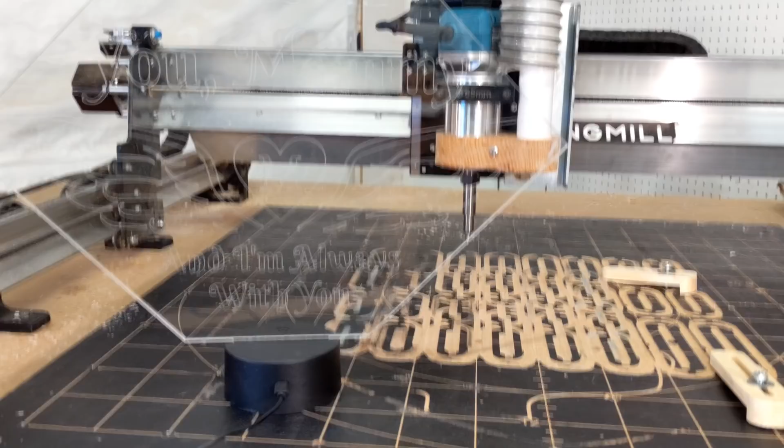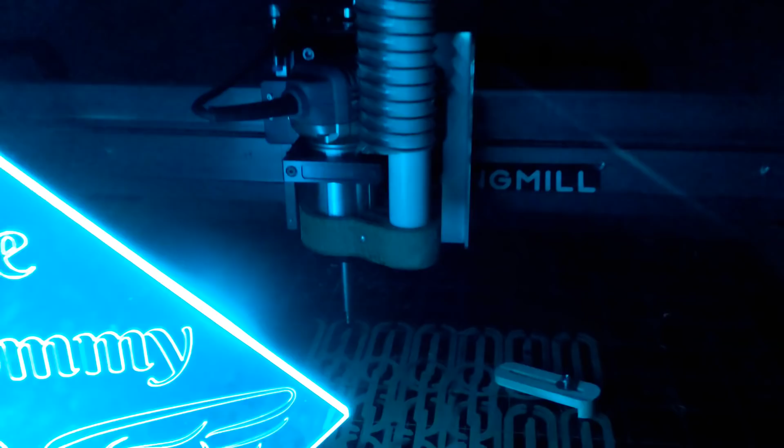So let's show you what this looks like. 'I love you, Mommy.' Remembering Maddox, who died in my daughter's arms, her son. And 4 years later, she still grieves. Made on our LongMill. Look how crisp and fine these lines are. 'I love you, Mommy, and I'm always with you.' She keeps this in our bedroom now.

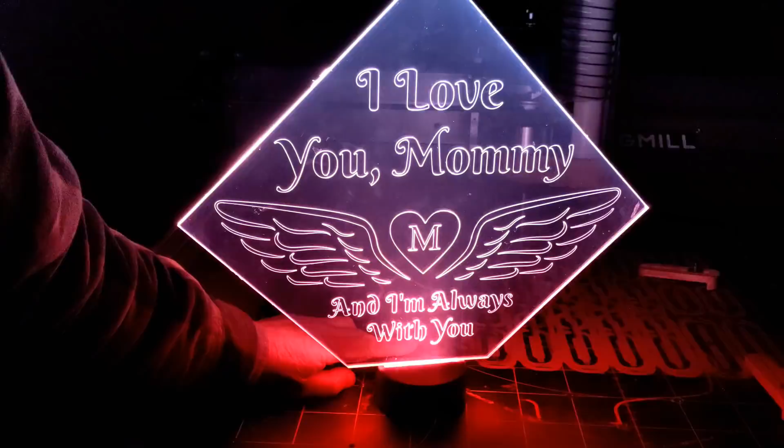And I'm going to leave you to this, to watch this sign that means so much. My last message to you is go enjoy your life, because you never know, ever, when your day is the last. In memory of Maddox, my third grandson.